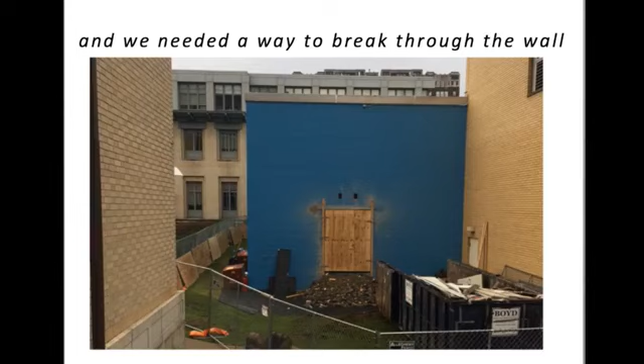Well, there's the blue wall. We had to put that in there. That's a blue wall under construction, which was also a big impetus for our Tepper Quad project, for those of you who know the story.

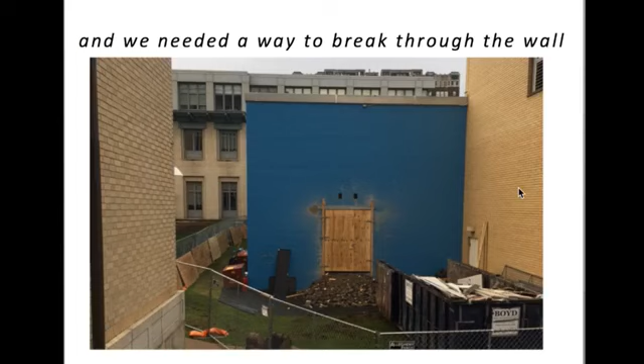We'll skip that. So I'd like Bob to go through these slides. Bob, we stole from city planning, and he is a brilliant thinker and does the work of 3 people. He's extraordinary, and connects well with our architects, is our fixer downtown with things like city planning and zoning. I'll click the slides, Bob, if you want to walk through them.

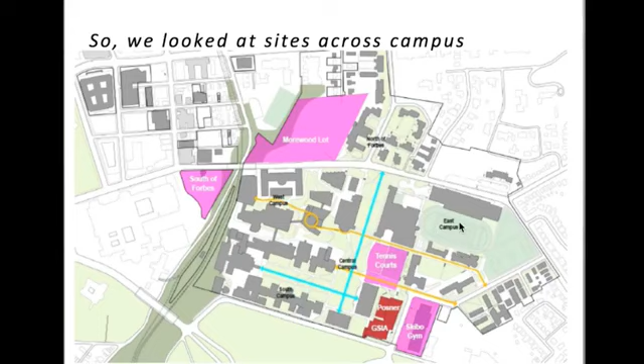So thanks, Ralph. So, ooh, that's loud. Is that as loud as it sounds like to me? I know, I told him I didn't need a mic. My wife reminds me of that all the time.

So back in 2010, when we were looking at this, we started thinking about, we knew we didn't have enough room, as Ralph showed the slides of old GSIA Posner, how we had run out of room. We like to say that building is the poster child for incremental institutional expansion, added on to 7 times over its 50-year lifespan. And so we said, okay, well, we can't do any more kind of Band-Aids at that site. Let's look at other sites.

And so we kind of cast a wide net at the entirety of campus. We looked everywhere from the south of Forbes site, the site we're sitting on of course, the Morewood lot. We looked even at the tennis courts at Skibo Gym. And if you look at the next slide, you can see we actually compared them all. And when we came down to it, only one of them was just right. The south of Forbes was just a little too far away from campus.

The tennis courts was maybe just too small to get all the program we needed on. If you haven't been in the building, it's big here. The Skibo gym had a historic building on it.

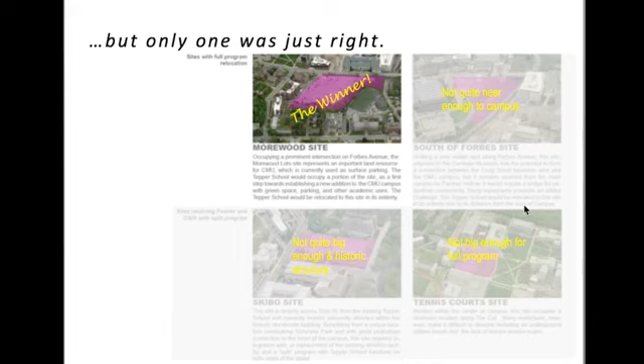So the Goldilocks site really was this one that we're standing at, which was really exciting because we had for many years talked about the expansion of campus across Forbes Avenue and the growth of the campus, and this is the kind of future of campus. So we took this site.

However, if you looked at our master plan that we were dealing with in 2010, our master plan had different ideas. Our master plan talked about at that site, what actually the site we're sitting on was going to be an academic building, but also a soccer field, which is kind of sitting there in the middle of it. And so we really needed to kind of start rethinking what that meant as we wanted to grow. We wanted to grow campus. What did that mean as we move forward?

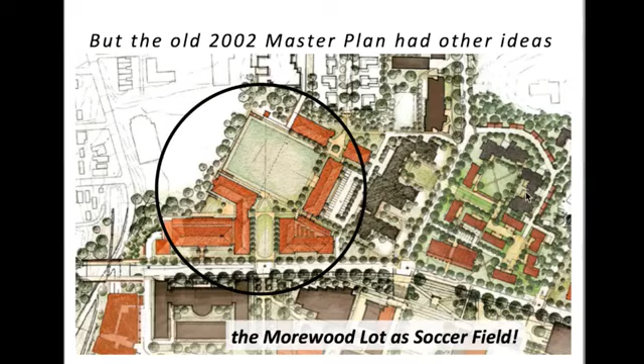So if we advance up, so that they're showing the soccer field and the site that became now the Tepper Quad. Next slide, zoomed in. So we started to look at campus, and this is a shot from the 2012 master plan. And we started looking at where the growth patterns were.

And if you've been hanging around campus for the last 5 years, we've had lots of groundbreakings, which is very exciting. Everything from Scott Hall to the work at Hamburg Hall to the Cohon Center expansion that opened a couple years ago. If you stick around, not too long from now, we'll have a big opening for Ansys Hall in about a year from now. So that's all very exciting.

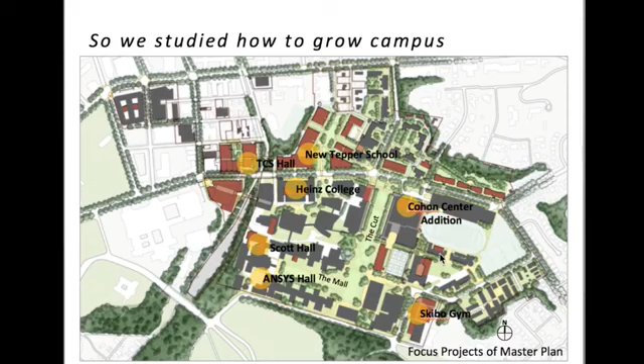And all of that growth kind of showed as you started to move towards the north and across Forbes Avenue. And that is where the Tepper Quad really was born.

So as you start to see, as we zoom into this area, we look at it. If you notice, there's that kind of triangular building. Forbes is running through the site. We're at the building on the left-hand side of the image here. And there's that triangular building.

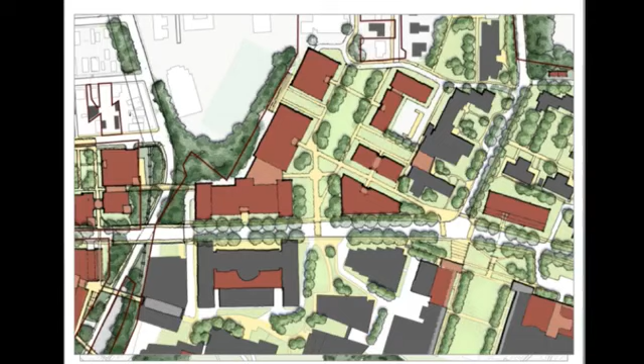Immediately, we started readjusting the master plan. And you'll see in the next image as we advance, we eliminated that building, created the Tepper Quad, identified where this new big building, this new home for the Tepper School of Business and the other functions were, and we adjusted the master plan accordingly.

And next thing you know, voila, we have the Tepper Quad, which we're very excited about. Now this is the first building in it.

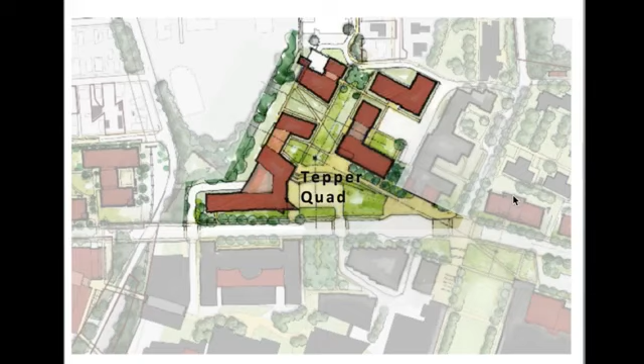Of course, the Tepper Quad was not exactly attached easily to campus. Many people asked where we were going to put a bridge to get over to the Tepper Quad, which we decided not to do. In fact, we started doing a number of other things. We started increasing and improving the pedestrian connections. We added traffic lights. You saw our temporary versions that are out there right now that'll become the permanent. Those will become new permanent traffic lights to get people across Forbes Avenue onto campus.

We started extending utilities like steam lines and chilled water lines through a tunnel that Andrew's going to talk about. We brought in electricity onto the site. We brought in data. This, of course, is Carnegie Mellon. We love our data. So all of these things, and of course we had to deal with getting things off of the site. So where were we going to put our sewer lines? That all these things started to knit the site ready to go.

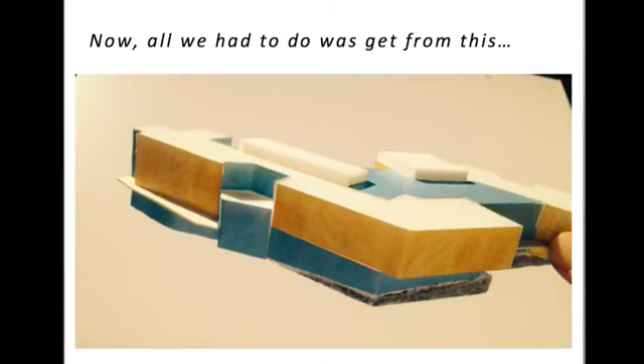So I guess I'm going to turn it over to Brian to talk about that next. Brian Rutledge has been unbelievable. We've probably had you in 250 meetings. Oh, yes. And very productive. Brian, very level-headed, steered us out of danger many times. And his wit is unparalleled.

He gave a talk, usually when there's something called the Society for College and University Planning, or SCUP. And they had the regional conference here recently.

And usually it's people like me who speak. And I said, well, if they want to have fun and they came to campus, let's put Brian on the stage. And the first thing, what was the first thing you put up on the screen?

The cartoon. Far Side cartoons. Go to strength. Personality type by Far Side cartoon. So to this day, we're still hearing from our professionals and peers around the country about that guy that gave that talk at SCUP. He was unbelievable. I have SCUP listed on my CV now. I'm quite proud of that.

So thank you. And for those of you who asked, this did not happen while on the bike. Bike riding is very safe. It is falling off your bike that is to be avoided. Getting off quickly, right? Yes, there's no easy way off the bike, and timing is everything.

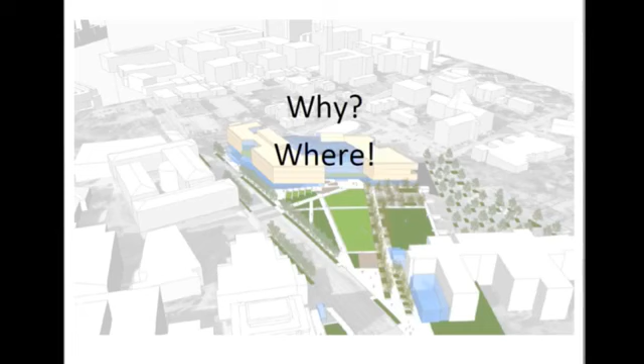So to do this, one of the big components is the where component. Let me click through this quickly since you saw these earlier slides. Buzz put this slide together and I've been stealing it ever since. The Tepper School is right at the heart of that figure 8, the business school is right at the center of campus now. You gotta bend some non-Euclidean geometry if you want. Chris is pretty skeptical, fair enough. But what we are is really busy.

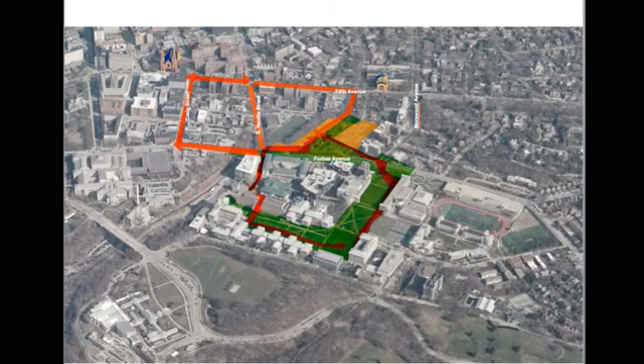This is way different from how you used to build business schools. Business schools used to be off at the edge of campus because you didn't want your business students bumping into anybody who wasn't a business student—they're very gentle, like orchids, so you kept them off on the edge. No, now you are right in the heart of it, and you see this in the path out there. There's just thousands of students passing by, all coming to our big hub to get a cup of coffee, like moths to the flame. We're sort of right at the heart of things.

So the two components that put this together: this is the notion that Bob uses of interconnectedness. What do we mean by that?

If you think about collaboration, collaboration is efficient in the sense of the classic economic division of labor. I do theory, you do data, I do my theory bit, you do your data bit, we merge them up, off we go. You do finance, I do some cryptography, we put them together, there's your fintech. Interconnectedness is different. What we mean is I will teach you my theory, you will teach me your data techniques, and we'll have this deeper understanding.

That's the sense in which it's not Word documents floating around different departments getting edited, but this coming together and deep understanding, where you can ask and understand new questions by understanding what's going on. Fintech is not just finance done through technology—it's the technology transforming the finance in deep ways, and vice versa.

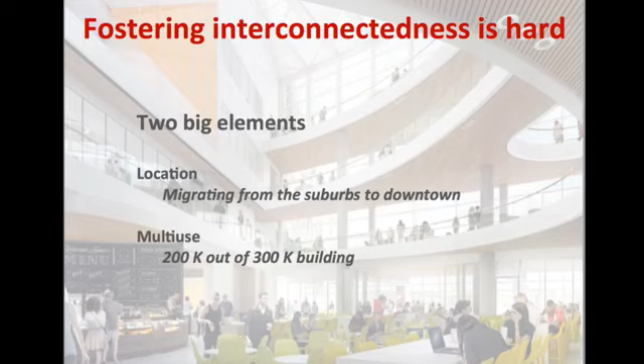So the two big elements here, and then I'll pass this off to Buzz: one is this location. This is the description I'd give faculty members here to get them ready—this is like moving from Fox Chapel to Lawrenceville. So it is time to embrace some skinny jeans, a fixed gear bike, craft beer.

It's going to be noisy, it's going to be smelly. It's this very urban experience—lively and vibrant. It is no longer this country club experience with violins in the background, and that's by design.

And then the second component of this is the fact that—and this is weird, you don't see business schools do this anywhere else—this is a 300,000 square foot building, roughly, of which maybe 200,000 square foot is the business school. There's 100,000 square feet of non-business school things. And for the most part, it's hard to point to places and see which is which.

Ideally, yeah, exactly—they sort of blend and mesh. We have different things living around here, and it's weird. If you go down and visit the Patty Kenner space, you're going to wear virtual reality goggles to learn how to speak French while ordering at a Parisian cafe, feeling like you're standing there. That's an odd thing to put in a business school, but then you think, how can every business school not have that? So the last component I'll show you.

Oh no, the slide—oh no, not the pond. Many people have seen my picture of the pond many times before, and it's a metaphor that is much loved.

Where? So, exactly. One could say that, yes. So how do you do this?

Some of this interconnectedness is organic, in the sense that people are bumping together, and some of it is more structured. If you look at the design of the building, it's not very precise—we didn't take a classroom and engineer it the way you typically engineer business school classrooms, placing seats in strategically round places to optimize sight lines, with the professor standing there wiggling his hand while everybody learns dividend policy.

It's much more flexible, and this came from a book on elementary school education, which was trying to challenge the idea that if people were not sitting in desks in rows, they could not learn how to count.

I don't exactly know the story, but I can imagine the frustrated architect saying, I'm tired of listening to you—you want your design? Here's your design, it's a freaking pond, I'm done. You roll it up, and you think about it: can I do all of elementary school education around a pond? And it turns out you can.

If you go around the pond, you can see them learning biology, and it turns out you can learn some math, and then it's a pretty good place for arts. Then you think about society sort of things—lots of societies live near water for reasons that are kind of deep, and wow, we get the entire educational experience around a pond.

But some of this comes from the idea of not trying to build the pedagogy into the building, in the sense that there are all kinds of smart people who work here, and smart people who will be working here who weren't here when we started. So much of the building is designed to foster this kind of innovation—all of the furniture that moves is designed to be moving.

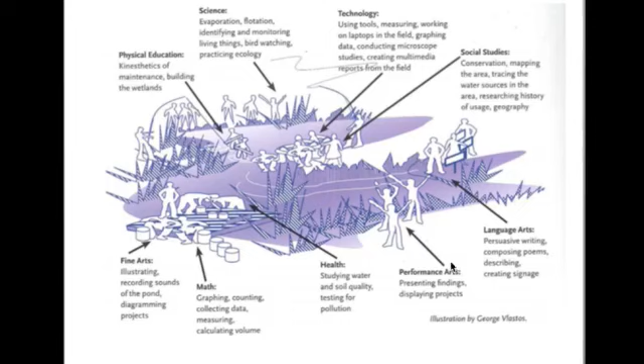Okay, so I want to show you one last picture. People were really into that pond—they were digging it.

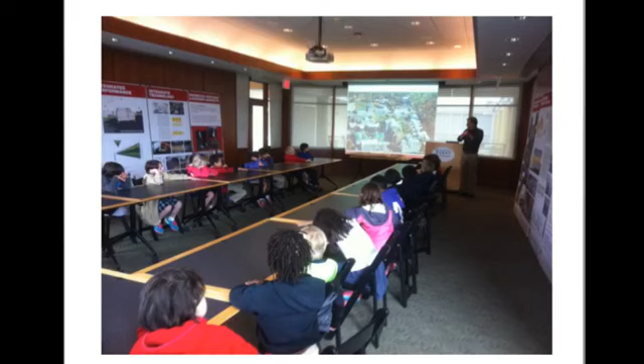Ralph mentioned we had meetings. I'd like to show you one particular meeting. If you notice the person on your left bending on their arm like this, this was what we looked like when we started this project. You'll notice Buzz is there. Shortly thereafter, there were many meetings.

Here you go. Thank you. Thank you, Brian. So, Buzz, I'll give this to you.

Buzz has been unbelievable. We were very pleased when Buzz was selected with his team, Jeannie and all the folks here, and Alan, a landscape partner, and multiple others from Buro Happold, and the rest of the huge team it takes to do this. Buzz has a coolness about him.

Can I tell the first story about David? Sure, okay—I'm not sure I know which one, but go ahead.

So we had the first executive steering committee meeting, with David and Subra and Jim Rohr, and he was introduced to Buzz. We were in the room, and our former chairman of the board was there as well, Ray Lane. David was sitting across from Buzz, and we were talking about things. David was very quiet, sitting about this far away, I think—Brian, you were there. And David said, Buzz, what's the best campus building that you know of?

Don't bullshit me. And Buzz was like, whoa, okay—and he said, no, I would never do that, David. Now to answer your question... he was so cool with that overhand right that came, and he's been cool all along, and obviously a thinker.

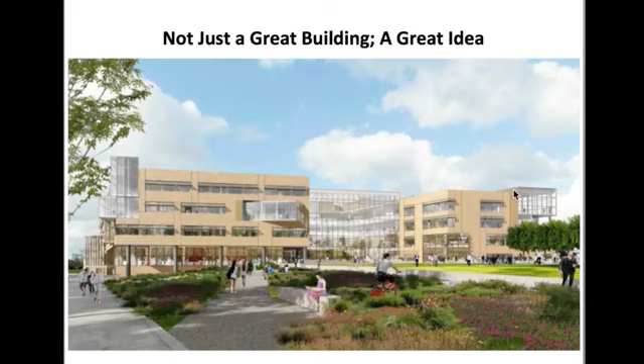Thank you, Ralph. It's been really an extraordinary experience for us, and thrilling in many ways. Just to follow up on Ralph's comment, I was scanning my mind as fast as I could at my age.

And came back and said, well, I think it's Thomas Jefferson's UVA academical village—and I think Ray Lane just jumped in and saved my skin. He jumped in and said, yes, that's the best building and campus space in the country. So we weren't fired.

One thing about interconnectedness that I think is special about this project, and it relates to things that Bob and Ralph and others have been saying, is that it exists within a set of almost nesting scales, from the scale of the region, to the scale of the campus, to the scale of groups of various sizes, all the way from 1,000 people in an event like what we just had down to 1 or 2 people looking for a quiet place and a retreat.

We also had a very interesting situation where Ralph mentioned there were 16 prime constituents. What made it not only exciting, but really allowed us collectively to be successful is that we fairly quickly developed what we think of as a high-performance team, in which everybody felt empowered to say sometimes difficult things and to challenge each other without losing a sense of collegiality and respect. That helped us enormously, because a project this complex always has bumps and valleys.

We worked with Buro Happold and with the DRB in studying in great detail the light levels, but also the views out and the connectivity. So there's light, there's comfort, there's views out, there's connectivity between different areas of work that people are doing. The DRB, particularly Vivian and a couple of others, were really standard bearers for holding the university to very high standards that every space must be daylit.

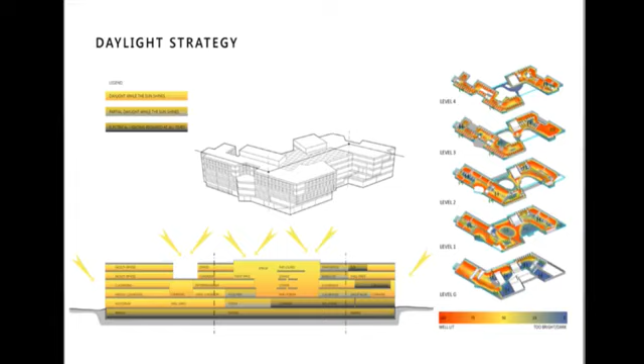One of our heroes, for those of us over a certain age, is Lou Kahn, who went so far as to say a space without daylight is not a space. You could argue that philosophically, but we basically believe that. We almost got stuck on it, but we got daylight everywhere.

As you move through, you'll see some of what we call borrowed light, where you see through a space to the landscape. Our team worked very hard to develop heights where the light could wash deeply in, because once the floors reach a certain height, you can wash the light deeply in. We tried to minimize glare, and we tried to pick up on connections and relations to adjacent buildings from the viewpoint of view.

But the one place where we got into a philosophical discussion was the people running the behavioral labs wanted them completely darkened. We did have some spaces, like for storage and for changing clothes, that were hard to get light into, and we thought, perfect, one of those spaces can become that. Then we had a discussion—not that long, but still a discussion—in the design review board meeting about whether it was okay to have darkened spaces for the behavioral lab.

As you walk through the building, you'll see how light plays, shade and shadow, on the outside of the building. That connection to the ability to maintain your circadian rhythms, and your sense of what the buzzword these days is biophilia, connection to landscape, are all very important to how you feel in a building. I was thrilled to meet one of Brian's colleagues in finance, who came up and said, I'm excited every day when I come into the building.

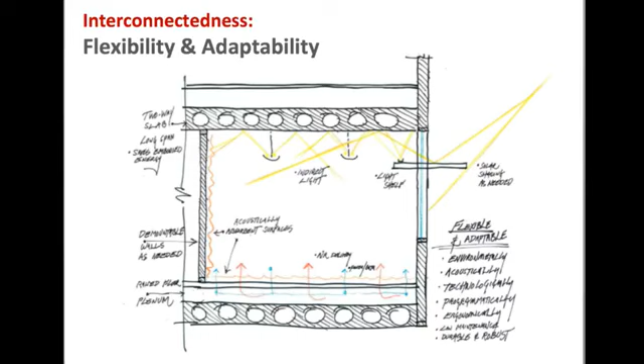So how all those pieces come together, with underfloor distribution of air and data in certain places, it's sort of a kit of parts. And the other part of that is, at the core of the success and the resilience of this building will be flexibility, and as much flexibility as we can possibly bake into and design into the building.

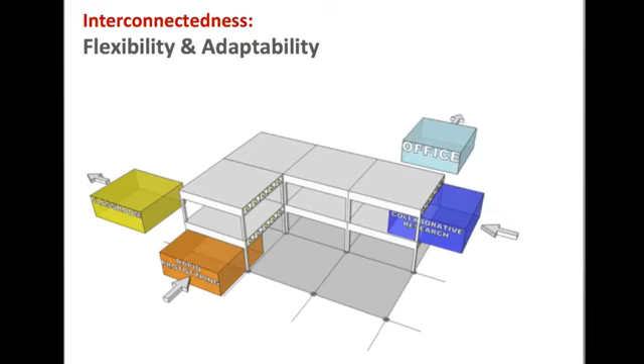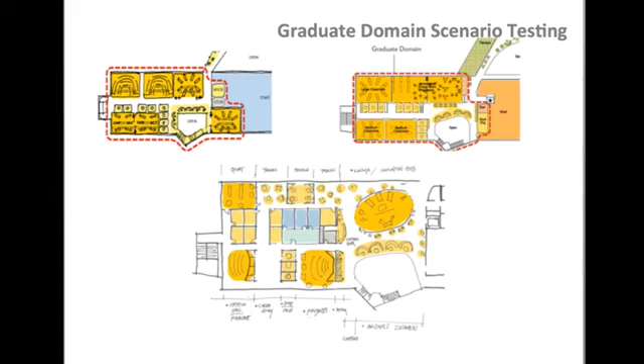Technology enhanced classrooms. And then where we had a lot of fun—and a lot of this was done in meetings and over the phone sometimes between meetings, sketching and holding up the sketches to the camera and going back and forth with Brian and Mike and others—was pushing that to become kind of a laboratory for teaching and studying.

So when you walk through, particularly the upper level of the graduate area, you'll see this really rich mix of informal meeting, but we wanted quiet study, not just only open. We wanted innovation spaces. We wanted coaching spaces. And so these spaces can have that much variation and more over the next 5, 10, 20, 40 years.

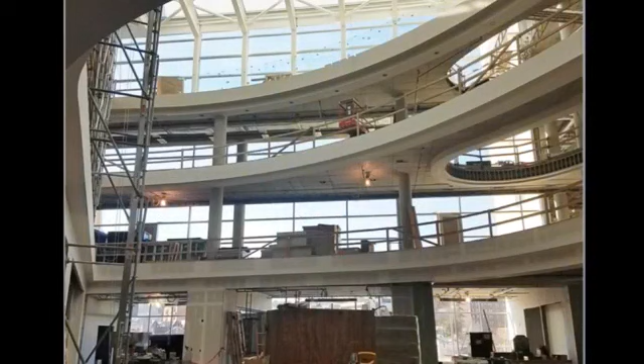The idea was to embed a robust infrastructure into a robust armature and then let there be lots of chance for variation. And you'll see as you walk through how the kind of what we call the choreography of community works, how light works, how a lot of the building is really pretty robust and straightforward, like a loft, like the places your students might go to work.

But then it's warmed and animated by color and wood. You see here the kind of—a lot of it is really what are the bones of the building. And what's great about working with this concrete system is once it's built, you've got the building. You can change the acoustics, you can change the amount of detail and richness, you can rough it up. It's meant to be used and tested.

And then it's meant to create many, many kinds of neighborhoods. This is one of the faculty neighborhoods, which has a kind of bar at the far end backed by whiteboards. So every place, every inch that we could support connectivity, interconnectedness, collaboration, and a sense of feeling good in the building happens throughout the building. That's it under construction.

Is this still me? The graduate domain, you'll see, is flexible and can have the entire graduate cohort. These sliding doors to classrooms open up, so it's got many variations. That's under construction. It's like a transformer.

And the undergraduates, David and Jeff were very determined that the undergraduates had a home base. But we overlap boundaries, so here the undergraduates' upper level is very close to entrepreneurship and can share an innovation hub with them.

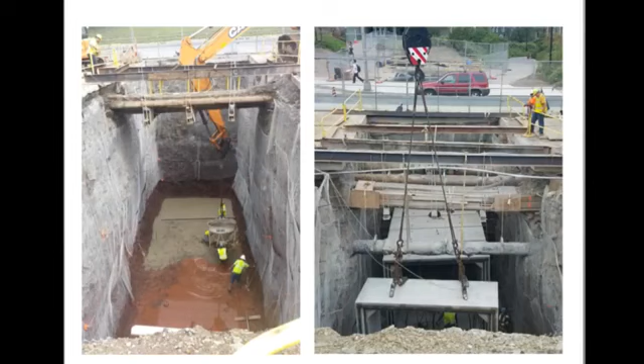It is not a tunnel, Brian and Bob. It's a utility crossing under Forbes Avenue. We didn't want to call it a tunnel because people were asking us to build a tunnel under, either a bridge over or a tunnel under, for connectivity for people. The reason why we don't put people in this is it's 28 feet down. Those yellow shirts are people down there, under Forbes Avenue. One picture shows the first half going across from Hillman, and the picture on the right is the second half coming on the Tepper side. I had to build half at a time during the summer, so in a 10-week period, we put that 28 feet under the roadway. That was summer 2015. We had the groundbreaking in October 2016.

We moved about 216,000 cubic yards of earth and dirt to make way for this, to make the pad for the building. You can see we're right up against Central's football field.

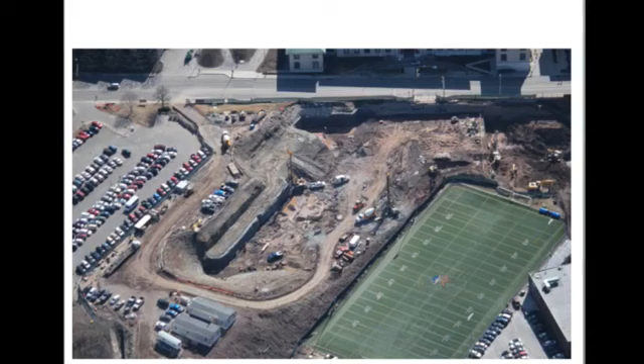And the rock was a big discussion, a big value management thing we had to do. We kind of built the building into the rock to try and save some money, trying to get as much space as we could, as cheaply as we could. So we stepped the building into the rock layer, so we weren't digging out the rock, which is 10 times more expensive than just digging regular dirt.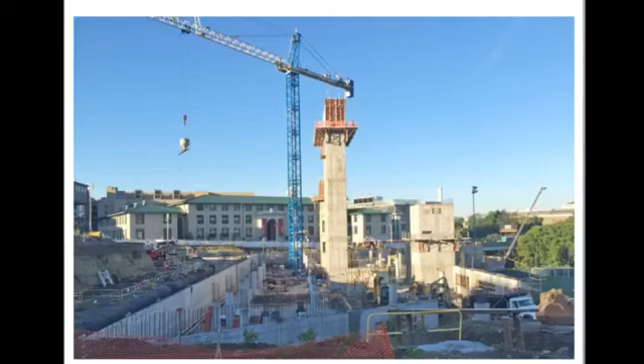We had a lot of sustainability issues in the process. The building is LEED Gold, will be certified LEED Gold. In the construction process, this sounds terrible, but there's a good side to it: over 2,100 tons of waste generated in our building process. Of that 2,100 tons, 2,000 tons have been recycled. So 95% of the waste going off the site from leftover crates, pallets, drywall, everything, 95% of it was recycled. It's a great stat for us.

The other one is the cistern. Down in the very lower right-hand, far back right corner of this picture is a cistern that holds 120,000 gallons of water, which addresses a huge stormwater runoff issue in Pittsburgh, as you all know, about floods and things, and has really helped us. That water used to go down Forbes Avenue and down to the bridge and blow the manhole lid off at the CIC driveway. When we had these rains, that hasn't happened anymore. Water still comes out, it just doesn't blow the manhole lid off, because we're capturing most of that now. On the rain on Sunday, we estimated on our 60,000 square foot roof, the rain was 3 3/4 inches, which was 150,000 gallons of water, so our cistern's already full.

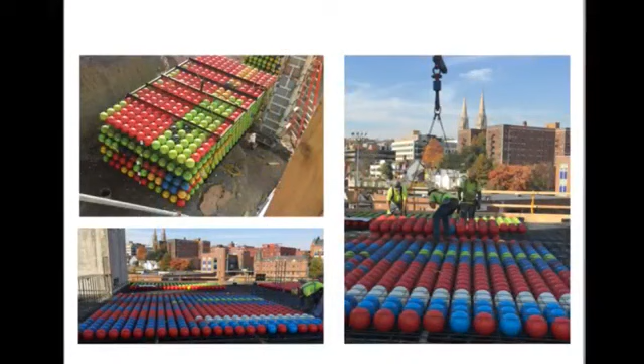People kept asking us if the colors meant something, if there was something to them. It was nothing at all. The manufacturer was in New Kensington, and they also make kayaks. They were taking their spare recycling misfits or extra runs at the end of the day and making balls out of it when they were making their kayaks. So it's the same material that was in kayaks.

The principle of that is you create great volume. What I love is the volume we get, because without any beams through the space, we can take the ductwork and put it right up to the ceiling. You don't have to drop down underneath a 24-inch beam somewhere. So we gain that whole volume, which gives us all these great high ceilings, because the slab itself becomes the beam. You get a top chord and a bottom chord, the way a steel I-beam works. I could talk about that for a long time, so I'll move on.

Please don't, Andrew. Construction, that's a great start. I like that. Got the dean right here.

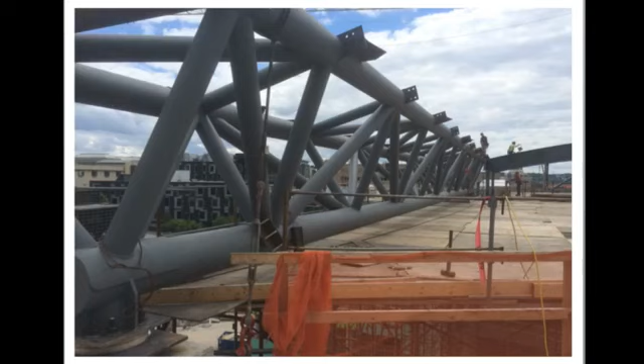The other big thing we had was the tri-chord truss out here in front of the atrium. Believe it or not, that glass wall at the front of the building, everything above the roof of the vestibule, is hung down off of this tri-chord truss. That's why you don't see the fins of that glass wall come all the way down to the floor - they stop because it's literally hung down and held by it. This was a huge momentous occasion when we put that tri-chord truss in place.

The key to construction of such a large project, and I say this because my nemesis is in this picture, because it still exists out there - that telephone pole that's leaning is a Verizon wireless Wi-Fi access pole that they have authorization from the city to put in, and we have just been battling back and forth to try to get it taken out.

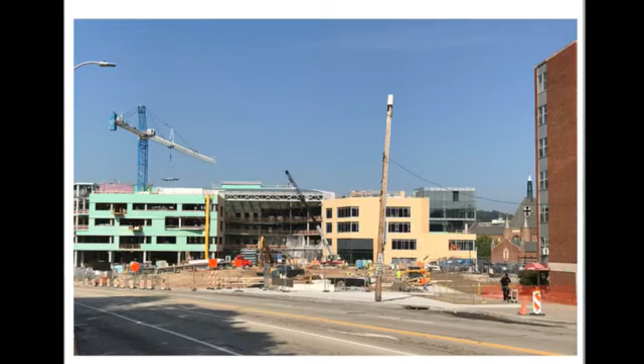Our new light poles that we're putting in will have capacity, thanks to Utkarsh and Mike, to take that wireless antenna that sits on top of that pole and put it inside the new light poles. We're just waiting for those particular light poles to show up. But communication is the key, even if you're fighting that communication company through the whole process.

Overall, see where I'm at.

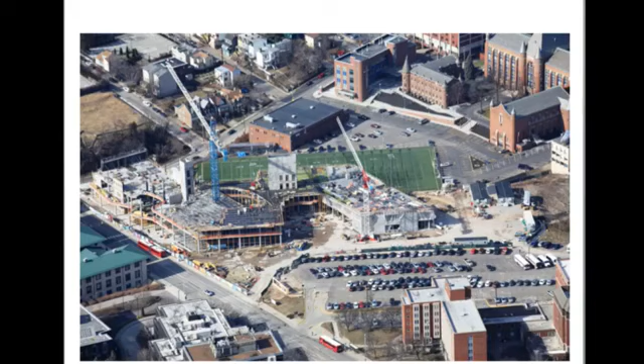I'd also like to thank Central Catholic. They were a great neighbor for us and a great ally in our process. We drastically changed our landscape - if anyone remembers, there was a wooded hillside, and they were pretty remote down there in the bottom. It's completely changed. And I'd like to also thank our team.

Mike Kelly, Brennan Garrison, Utkarsh Goodell, Rayhan's helped us as well. And our business operations groups, Ellen back there, we got to thank her too. Greg McDowell is here, he was part of the civil package doing the utilities coming to site. So I want to thank all of them.

Also, what was important to get to this finished product was that we tried things out - we did a big mock-up out there and tried things out, and as we said, it was a great team effort to help figure out and solve things.

I mentioned Jeff before. We've had lots of meetings here with the Executive Steering Committee, and usually about 2 hours later, Brian and I were on the phone with Jeff saying, here we go. And then Jeff would work it out, and we'd come back together and fix something. We did that dozens of times, and Jeff has been phenomenal to work with. Obviously astute at business, but astonishingly good at design and things aesthetic as well, which has been a huge help to us in terms of interpreting things with David.

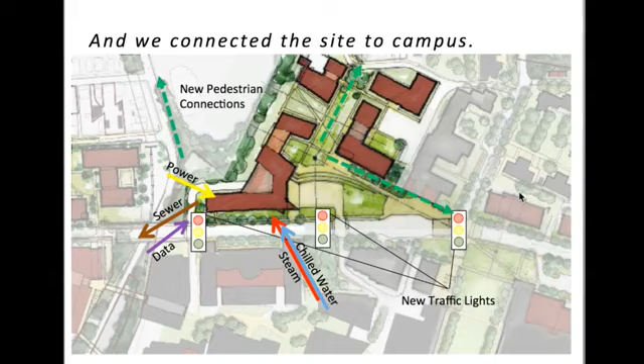Good question. It's worth noting too that the crossing you see, where the red and light blue arrow are, the one right out here that goes to Hillman, we started planning that crossing in 2006, both the utilities and the people crossing that space. We had no idea it was the business school moving here, but Bob and Ralph started planning that back in 2006.

There's a question over here, please. What's in the old GSIA, Posner Hall, my old school from '96?

In GSIA, it will be the master's program in the School of Art, and also the School of Music will be in there. And in Posner, it's a series of things, mostly Dietrich related, but also student success, a big home for student success, and a series of 10 classrooms that were Tepper-only classrooms, which are now back to the registrar. So it's a super win for the university as a whole.

I was commenting to the head of fine arts that they're taking over what used to be finance faculty offices and turning them into an artist studio. And that it was a shame that this gentrification was making it so that investment bankers couldn't afford an office anymore. It's sort of a weird direction, but it makes me kind of happy.

Questions? Yes, ma'am. Now that you see students and faculty using the space, are they using it the way they anticipated, or are there any surprises with how they use it?